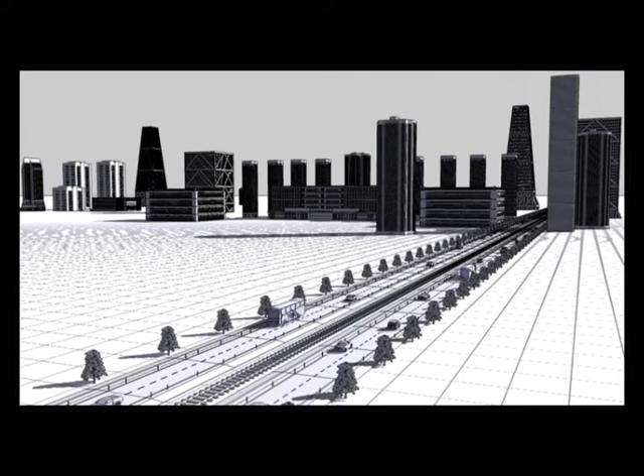In the last few years, and it will be greater in the near future, the sensibility of the populations is growing towards a greater responsibility on the thematics of pollution and energy savings, in relation to the traditional transport systems that become obsolete and inefficient from the consumption and environmental impact point of view.

Also, the governments of the main industrialized countries, the United States in the lead, are in the process of defining the characteristics and high standards that next future vehicles must have, and which the automotive companies must respect.

The vehicles represented in this animated picture are all propelled by electric motors and not by endothermic engines. Unlike the old electric vehicles produced up to now, these vehicles hide a significant difference in their technology.

They are very long-range per-charge vehicles, because their autonomy is not conditioned by the poor performance of modern accumulators, still well far from being totally efficient. As a matter of fact, modern electric vehicles have the uncomfortable problem of stopping every 100 kilometers to plug into the city grid to recharge their batteries.

Moreover, those vehicles are realized in a poor way, without strong appeal to customers. In fact, the construction strategy for today's electric vehicles is based mainly on an enormous lightening of the vehicle's mass, in order to obtain a little more autonomy on the accumulators.

But ultralight and less safe chassis, fewer accessories, simplification and impoverishment of the inside aesthetics are provoking very low attention by customers, who will keep on preferring traditional, luxurious and high-standard endothermic vehicles.

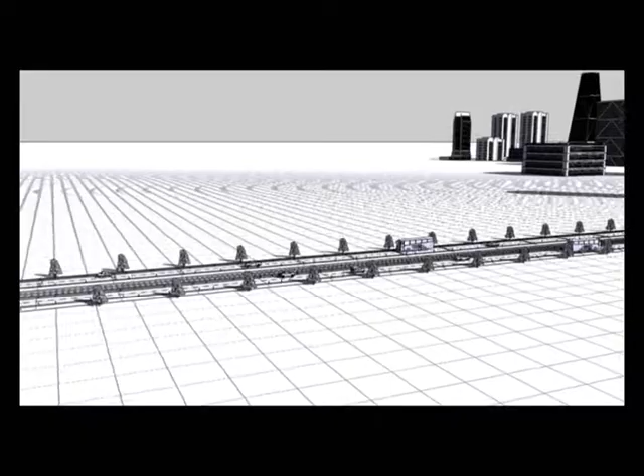The PEWERS is applicable to any civil, military, industrial or sports vehicle on wheels, propelled by an electric motor. The heart of this extraordinary device is a fundamental component present in almost every vehicle: the wheel, which is the protagonist of an extraordinary technical and functional evolution.

Thanks to the PEWERS, it's now possible to transform a normal wheel of any vehicle into a sophisticated electric energy generator, able to work during the movement of the vehicle without increasing its energy consumption, producing electric energy by the conversion of two main sources of energy.

The gravity force pulls the vehicle to the ground. The kinetic force, produced by the movement of the vehicle, is intercepted by the wheel's rotation. Both these sources of energy are freely exploitable, on condition that the movement of the vehicle is not jeopardized and, most importantly, the energetic consumption of the propulsion is not augmented.

Up till now, only the PEWERS device can do that. This car, for instance, is running thanks to the contribution of electric power furnished by our PEWERS apparatus installed in one of its wheels.

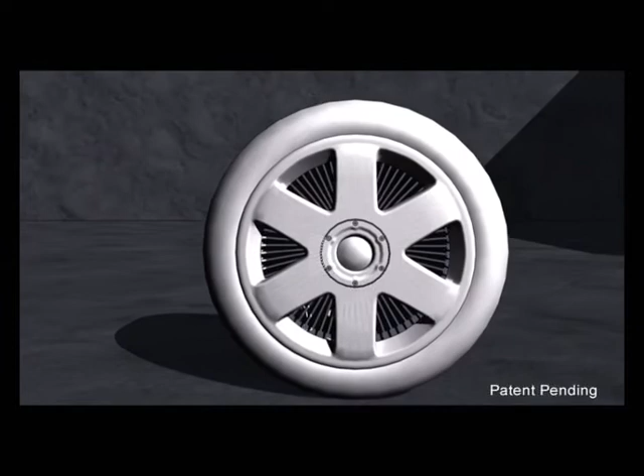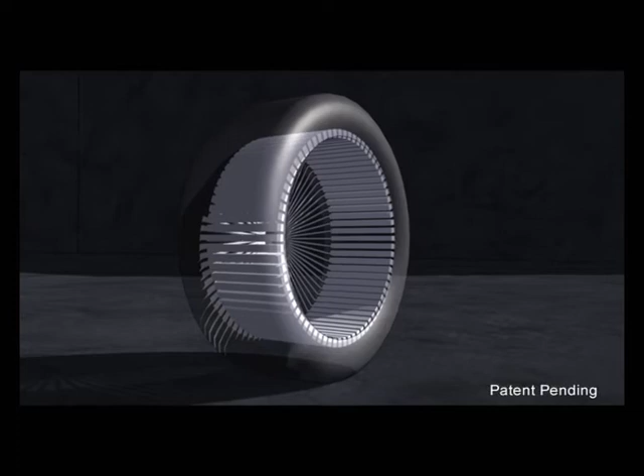We can see, in detail, that this tire has become a sophisticated electric energy generator thanks to a radial disposition, on its inside, of a series of piezoelectric sensors. A piezoelectric sensor is an apparatus composed of ceramic or crystalline material that possesses piezoelectric characteristics, such as the ability to convert a mechanical strain, such as pressure or torsion force, directly into an electric signal.

In our case, the pressure or mechanical strain derives from the vehicle's weight, supported by the tire, which in normal cases is not exploited, and is therefore wasted.

The positioning of a piezoelectric sensor at any point of a straight line, starting from the wheel axis, downward and perpendicular to the ground, allows the sensor to intercept this pressure strain exerted by the weight of the vehicle.

Such pressure is captured by the sensor and transformed directly into an electric signal, which is then discharged during the pressure release phase caused by the rotation of the wheel. In this phase, the electric signal is collected by an electric conductor and delivered to the accumulators.

So we can see that, during the movement of the vehicle, in any direction, the rotation of the wheel stresses alternately all the piezoelectric sensors, disposed radially along the circumference of the wheel, producing a continuous flow of electrons that are then captured and carried through the cables to the accumulator cells.

In this way, the vehicle obtains remarkable autonomy by recharging its own accumulators through simple movement. That movement will not be compromised by the presence of the piezoelectric sensors.

The PEWERS is a modular system, and it can be installed in one or more wheels, according to the power and autonomy required. Another precious characteristic of the PEWERS is its versatility.

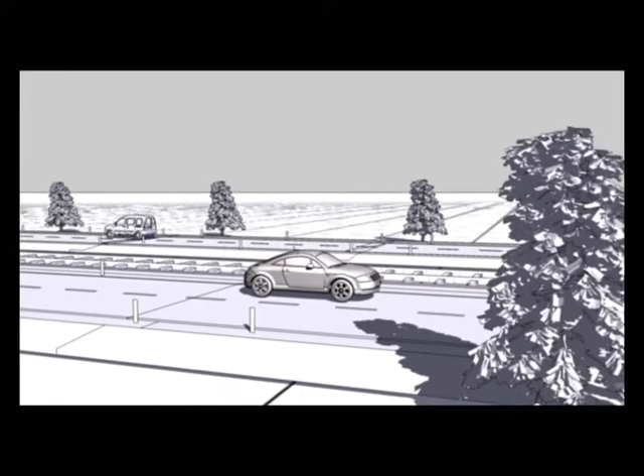It can actually be installed in any and all means of transport on wheels. In fact, thanks to the PEWERS, it is now possible to build heavier electric vehicles, such as buses, trucks, and vans.

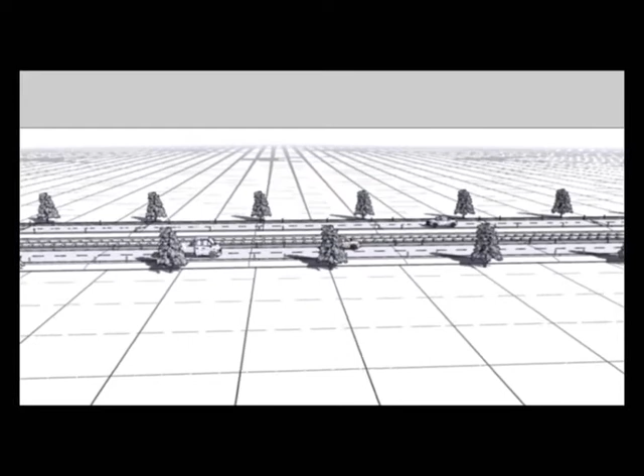Also, imagine a train that can generate its own power simply by transforming all of its wheels into PEWERS units, with the surplus voltage generated by PEWERS discharged directly into the national electric grid. This would transform the train into a self-propelled electric station, with evident commercial benefit.

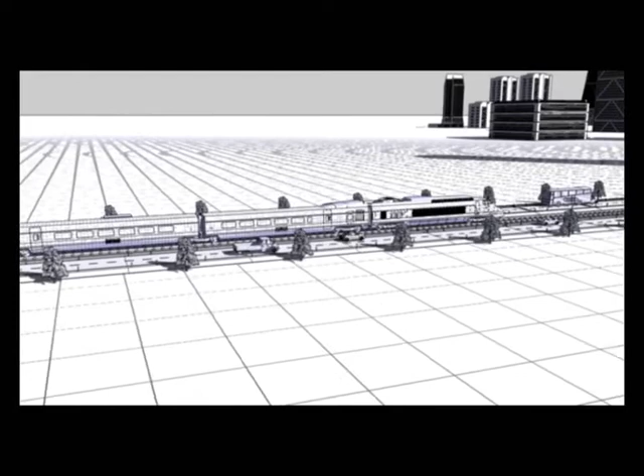The commercial potential of this device is evident. The technological revolution that the great automotive companies are demanded to achieve, with the production and commercialization of plug-in electric vehicles and hybrids, is opening the base of a massive request for high-performance, long-autonomy vehicles without sacrificing security and comfort standards.

Comfort standards. The technological revolution is PEWERS.